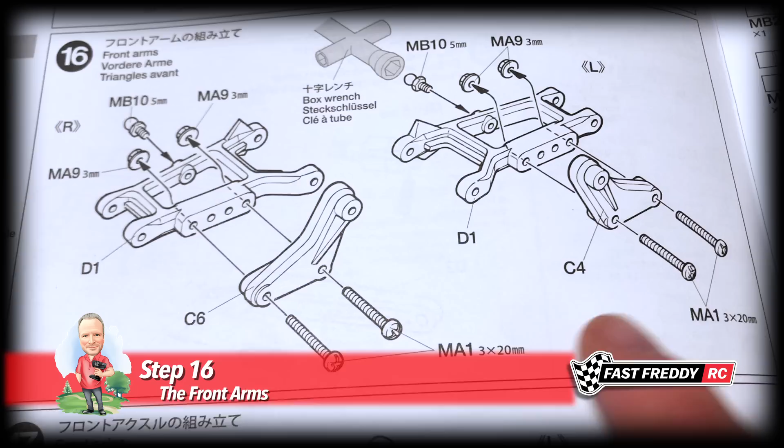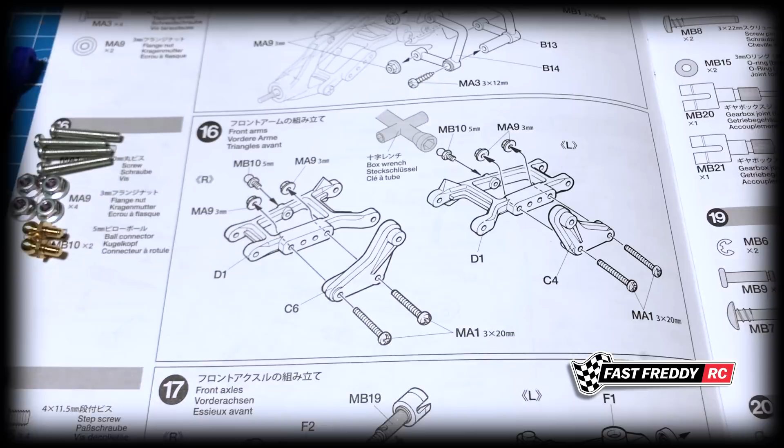So for step 16, the front arms, we need to grab D1 again. They're the exact same ones as before for the rear, but we have these C6 pieces that need to be attached as well, along with a number of screws, flange nuts, and ball connectors. So there's our arms, and then there's these two C4 and C6 pieces. I'll set this up and we'll put this together.

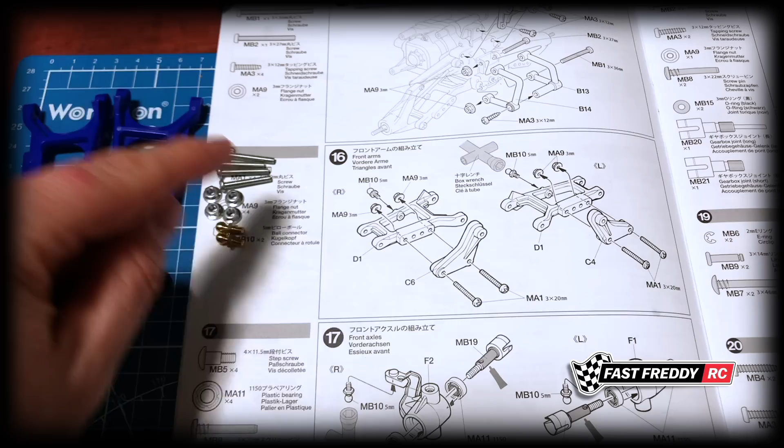So I think the first thing we'll do is get the ball connectors on. You can see with this one, if we turn this around, they're the exact same piece essentially. There's nothing really different about either one of them. But we need to get a ball connector into the back of this. Let's do that and make sure that goes in there, using that to kind of level it out. There we go, pretty level.

So we can just screw this all the way in. I'm not going to over tighten because you don't want to strip anything out, but I do want to make sure it's definitely nice and tight. So there we go, there is one in place.

So if we turn this around, because they're identical, but we need to have these facing out, we need to get the other ball connector in place. So that's got to go here. Make sure that that's going in level. It's not this time, so I'll just pull it back a bit. Make sure that it is. It is now, so we'll screw that in all the way.

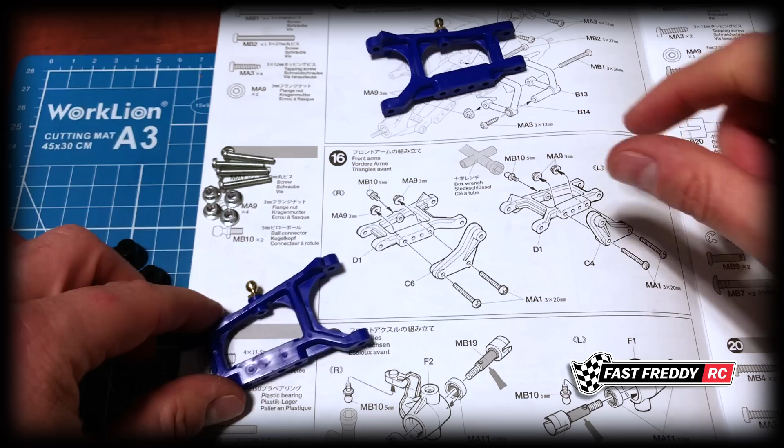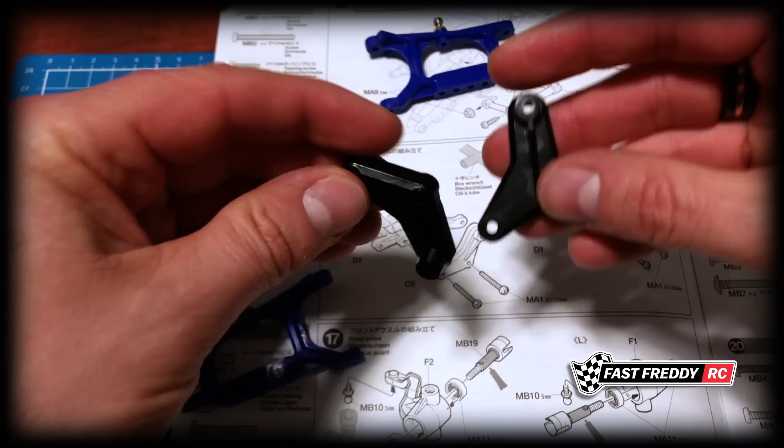So what do we need to do? Well, let's work on this side first. So you need the C6 piece. Now if you've cut these off and get kind of confused, it's not really possible to mix them up because this has to be at the top, and you can't do that without it being in the wrong direction. So if we stick with this, you can see that it's going to sit there.

And we've got two screws that are going to come in on either side, and then it's a flange nut that is actually attaching it all. So if I actually hold that there, because it's right in between the two arms, I'm going to use the screwdriver here and hold the flange nut. Now, I'm not screwing this in all the way yet.

I want to make sure that everything is seating properly. So again, I can hold that and screw that in just like that. I can feel it going all the way in. It's at the end now, so I will start tightening this up. Again, it's a flange nut, not a tapping screw, so make sure it's nice and tight, but don't over tighten anything.

That feels pretty good. So there is one of the arms ready to go. We're going to do the exact same thing on the other side, only this has to be facing up and that way. So let's grab a screw, put that in there, and we've got to get our flange nut in there, up and through. I'm going to back that off a bit so I can get the screwdriver in there.

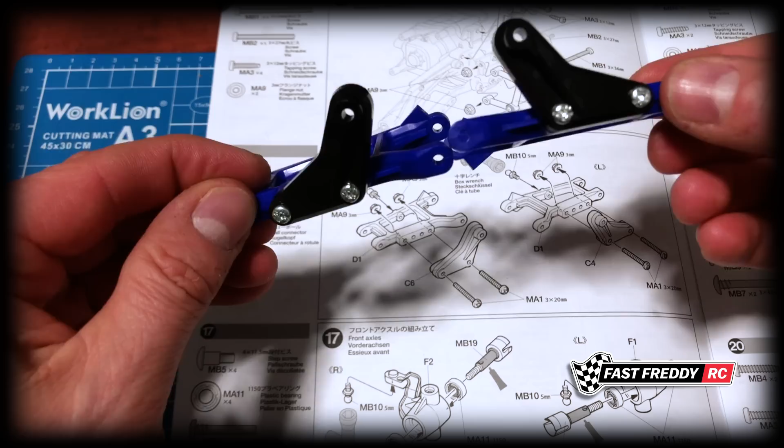There we go, so now we're going to tighten this up. Maybe I'll do it this way, it's easier to hold. So again, I'm tightening it up, but don't go too crazy, you don't want to strip anything. That feels pretty good. So there are our front arms complete. So step 16 is done.

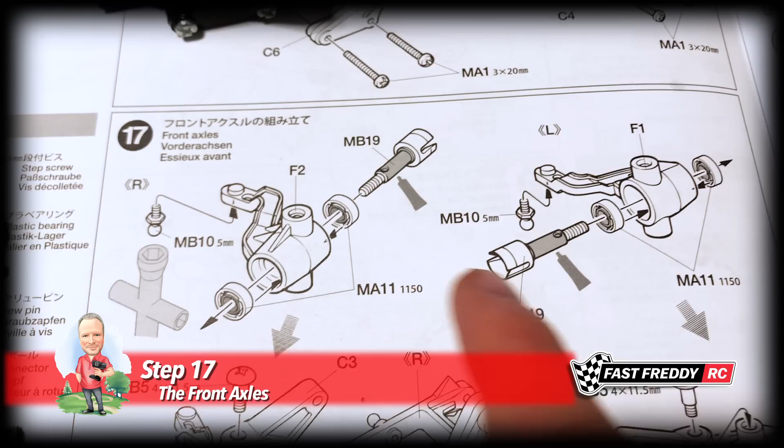So now we're going to move on to step 17 and work on the front axles. You can see that we need to build these out first, and then we'll attach them to the arms that we built in the last step. And you can see there's quite a few pieces here that we need to collect.

So there are all of the step screws, the bearings, the screw pins, the ball connectors, and our axles, and then of course our hubs for attaching all of the axle pieces as well, and of course our arms from the previous step. I'll set this up and we'll put this together.

So the first thing we'll do is get the ball connectors onto these hubs. Now if you've cut them off the F parts tree, what's interesting about these is you can't really get them confused because this says F2. If I grab this one and think, oh, this must be the right way, you'll notice it actually says 1. And this one says 2 right there.

So we know that this is the F2 piece, which means that we know the ball connector is going to come in from the bottom. So let's do that. We've got our box wrench. We know it's going to go into that hole right there. So let's make sure this is going to fit.

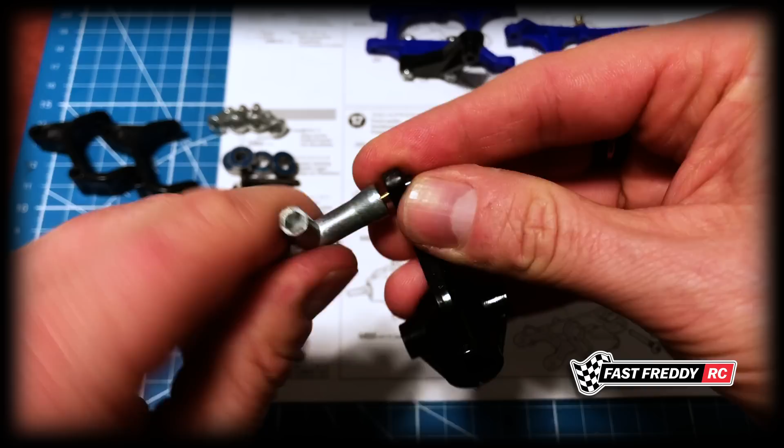Now you have to make sure that it's going to be level. It's not quite right yet. We've got to get that in as level as we can. That looks about right, so let's screw this in. No, not quite, I'm just going to back this off a bit and make sure that it's going in level. Now that looks better.

So we can screw this all the way in now. And again, when you get to the end, you want to make sure that it's definitely in, but don't over tighten. There we go, so that's one.

So what we can do is we can put in our ball bearings. Sometimes they're a little tight, so I'm going to use this wrench, using the ends to push it into place and get it down there in the hole. That feels pretty good, and we'll stick the other bearing on the outside. So again, that's in the correct place. So there is one of our hubs correct, and I'm not using grease because we're using ball bearings, so I can just slide that through. So there is one hub ready to go.

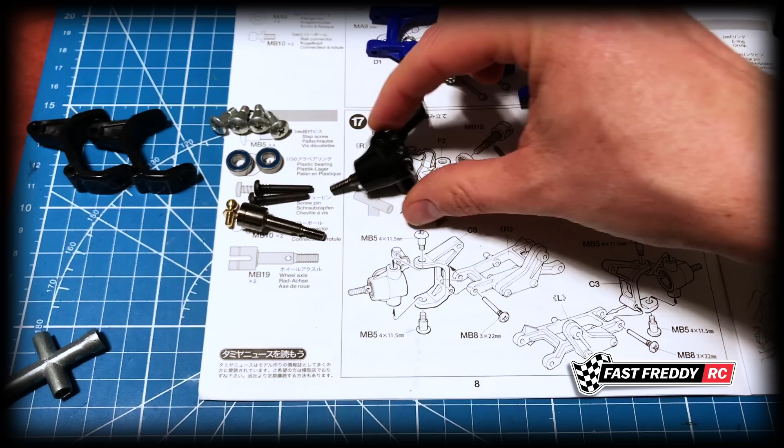So we're going to do the same thing with the other side, and again it's got the little 1 on it. We know that's going to sit like that, so the ball connector is going to fit on the other side. So again, going to try and get this in level. Actually, that time I got it in level right away, so this is a little easier. So we'll screw this all the way down.

There we go, so we've got the ball connector in place. Now we need to get the ball bearings in place. Same thing again, my fingers just aren't small enough to do it, so I'm going to grab this wrench here and push that into place. Now it's down there, nice and firm. And we'll stick the other bearing on this side, just like that. Again, we're not using grease because they're ball bearings, so we can slide the axle through. And there we go. So those are the two hubs ready to go.

So that means we can move on to the next step. You can see here's the right one, so that's the one that would be this way. We know we've got to put the hub piece into all of this, and we're going to do that right away. Now these pieces are C3, they're identical, it doesn't matter which direction you put them. So let's get the hub in place. You can see that the part that's raised is obviously at the top, so this is going to go in that way, and we're going to be screwing in these screw pins from the top going into that hub.

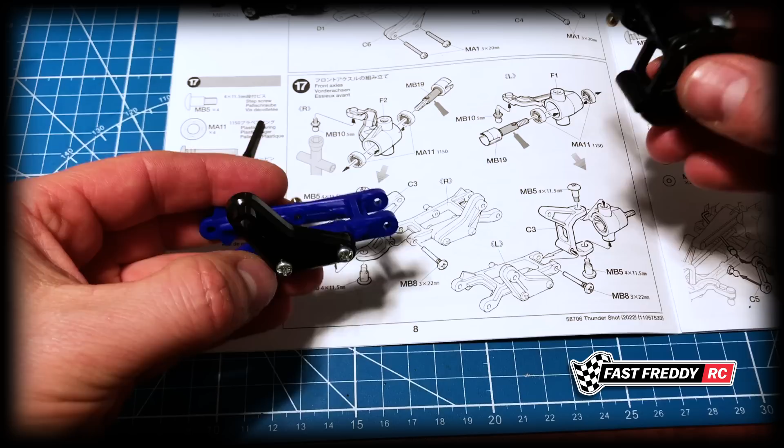So what do we have left? We need to grab the left arm. This is going to sit in at the bottom, and we're going to run a step screw through there, through the bottom of this. It's amazing how many times that kind of pops out. Again, let's try this again, in through the bottom. There we go, and we'll screw this one in all the way. Again, once you're at the end, you'll know. So there is the left side.

So there are the right and left front axles attached and ready to go. So step 17 is now complete. Now we can move on to step 18 and attach the front upper arms.